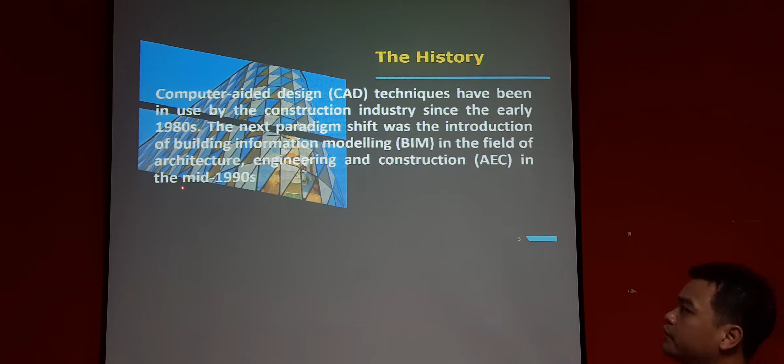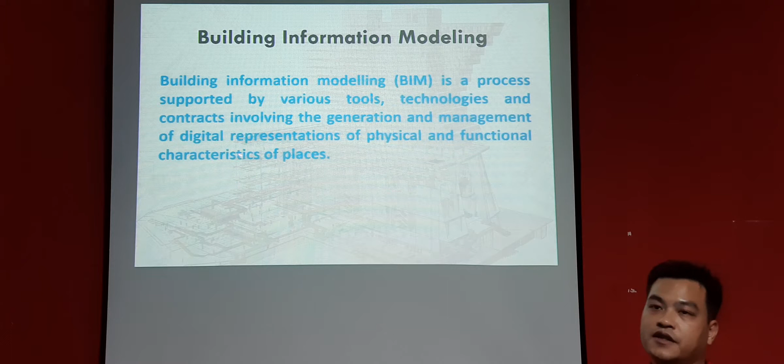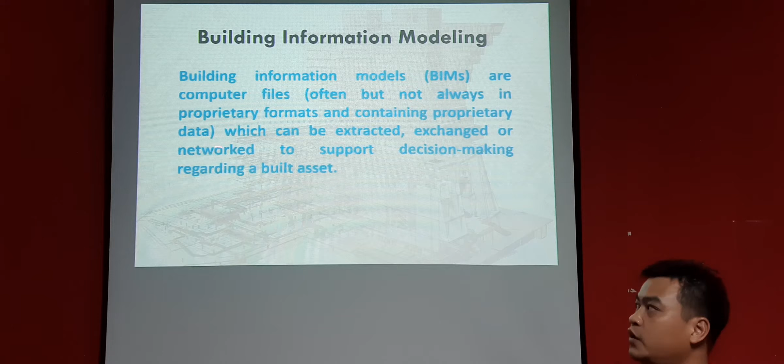Building information models are computer files, often but not always in proprietary format and containing proprietary data, which can be extracted, exchanged or networked to support decision making regarding a built asset.

BIM software is used by individuals, businesses and government agencies who plan, design, construct, operate and maintain buildings and diverse physical infrastructure such as water, refuse, electricity, gas, communication, utility, road, railway, bridge, ports and tunnels.

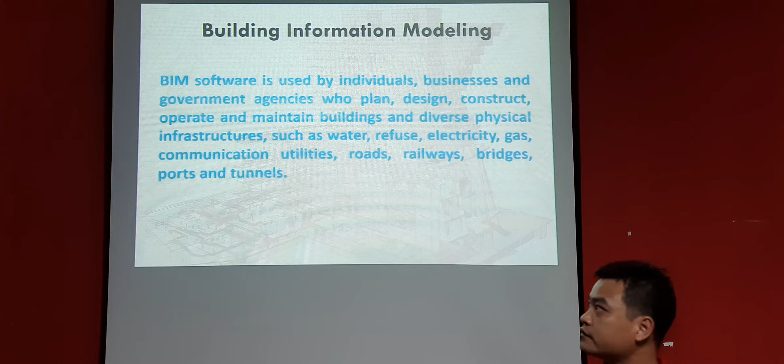In Malaysia, BIM implementation is targeted towards BIM Stage 2 by the year 2020, led by the Construction Industry Development Board, CIDB Malaysia, under the Construction Industry Transformation Plan, CITP 2016 to 2020. It is hoped to put more emphasis on technology adoption across the project life cycle, inducing higher productivity.

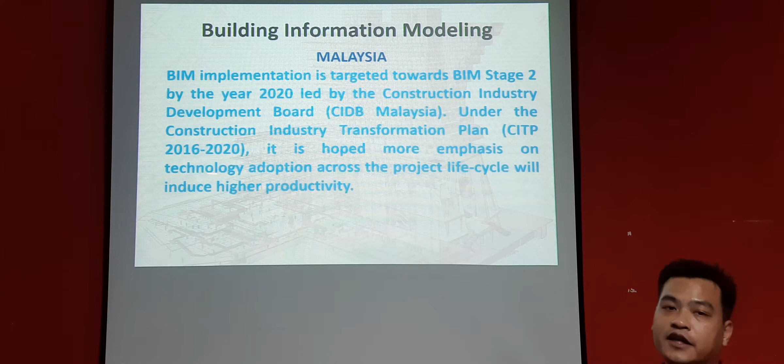How can BIM contribute to the development of smart built environments during the post-construction management of a facility? BIM is a methodology enabled by a set of software, tools and processes for the creation and use of digital representation of the physical and functional characteristics of a facility.

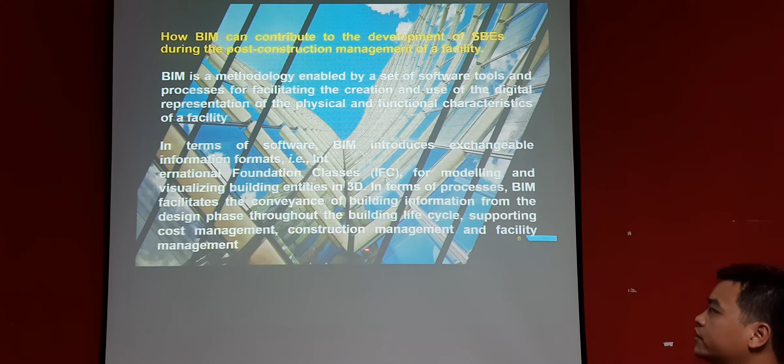In terms of software, BIM introduced exchangeable information format, for example International Foundation Classes, for modeling and visualization of building entities in 3D. In terms of process, BIM facilitated the conveyance of building information from the design phase throughout the building life cycle, supporting cost management, construction management and facility management.

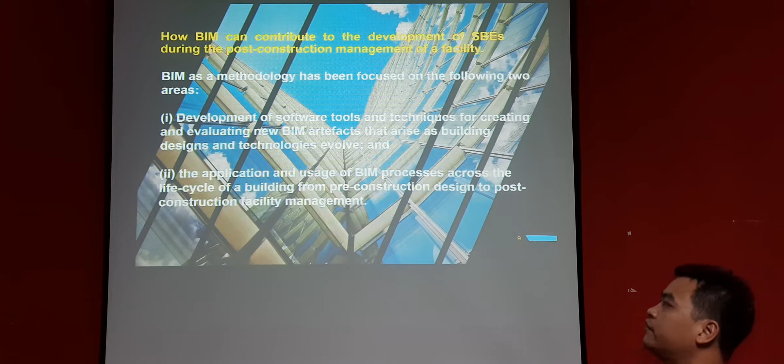BIM as a methodology has focused on two areas. Number one, development of software tools and techniques for creating and evaluating new BIM artifacts that arise as building design and technology evolve. Second, the application and usage of BIM processes across the life cycle of a building, from pre-construction design to post-construction facility management.

The aspect of information communication technology, ICT, is key in the construction and management of emerging smart built environments. Recent rapid advances in ICT have led to their pervasive use across industry sectors, including building and construction, and an upcoming important aspect of ICT use that we anticipate to take a central stage is the construction and management of emerging smart built environments.

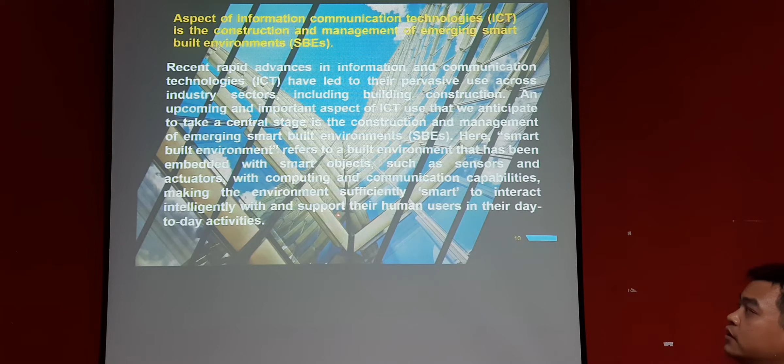Here, smart built environment refers to a built environment that has been embedded with smart objects such as sensors and actuators with computing and communication capability, making the environment sufficiently smart to interact intelligently with and support their human users in their day-to-day activity.

So, BIM in smart built environments. BIM hosts the collaborative architectural information and provides the semantic knowledge of the building. With the emergence of smart built environment technology, BIM should be further developed to be capable of seamlessly integrating smart objects in building design, verifying the SBE design, and feeding smart objects with relevant building-related information.

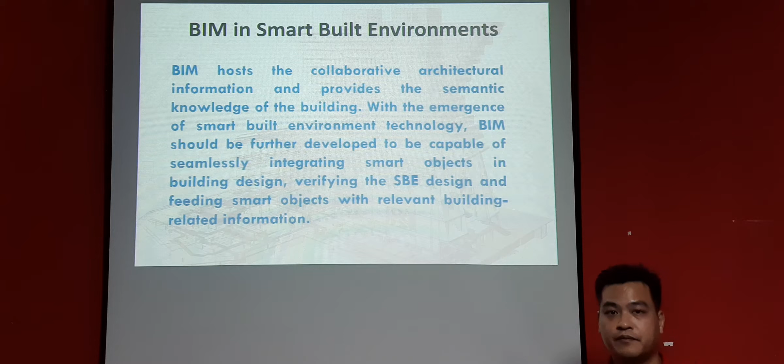Designing SBE with BIM is both advantageous and convenient. Firstly, designers of SBE can utilize the building knowledge of BIM for planning the layout of sensors, actuators and meters. The performance of smart objects can be verified against constraints and their layout optimized for the best functional performance.

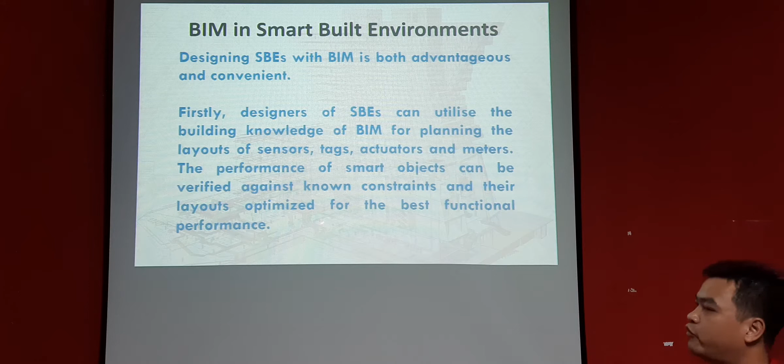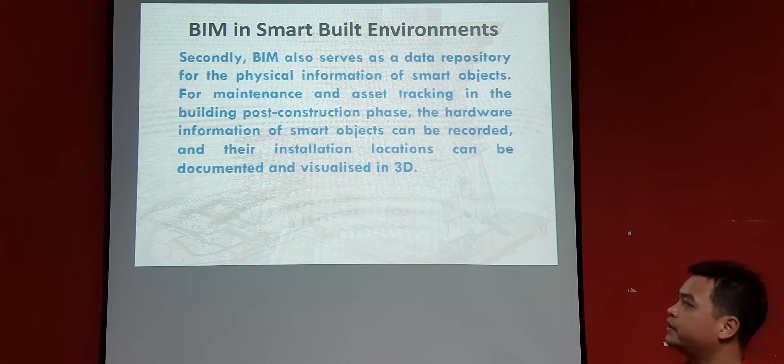Secondly, BIM also serves as a data repository for the physical information of smart objects, for maintenance and asset tracking in the building's post-construction phase. The hardware information of the smart object can be recorded and their installation location can be documented and visualized in 3D.

On the other hand, BIM provides a perfect ontology database for SBE. Smart objects may be designed and manufactured by different vendors. The data they provide may vary in structure, and they may communicate using different protocols.

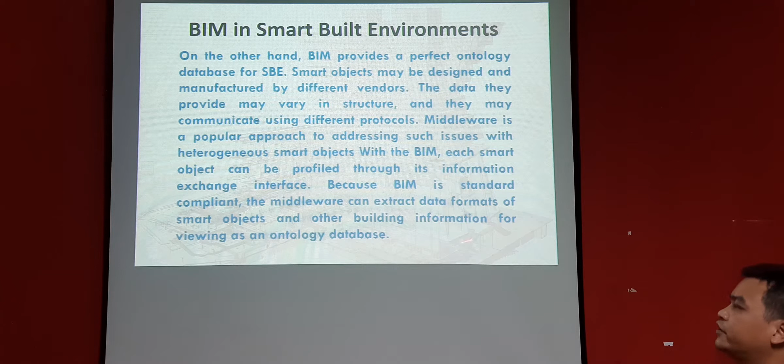Middleware is a popular approach to addressing such issues with heterogeneous smart objects in BIM. Each smart object can be profiled through its information exchange interface because BIM is standard compliant. The middleware can extract data formats of smart objects and other building information for viewing as an ontology database.

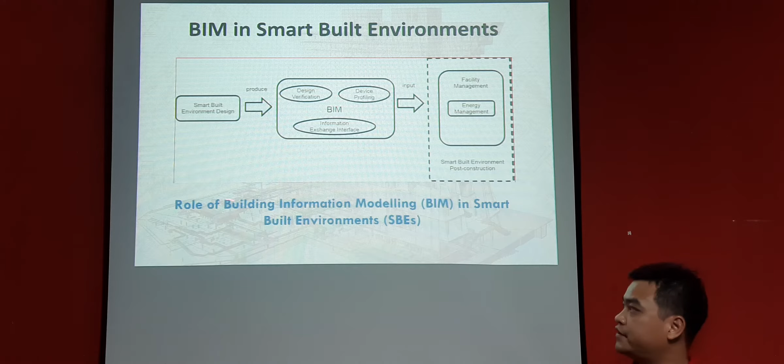So to summarize BIM in smart built environments: starting with smart built environment design, we produce design verification, device profiling, and information exchange interface within the BIM. The output becomes facility management and energy management, called smart built environment post-construction. So this is the role of Building Information Modeling, BIM, in smart built environment, SBE.

So for the case study, I have chosen 4 buildings as my assignment case study. Number 1 is the Beijing 2008 Olympic Stadium.

The 2008 Beijing Olympic Stadium is designed by architect Herzog de Meuron, with engineering consultant Arup UK, main contractor China Architectural Design and Research Group, and BIM consultant MTech Gehry Technologies. The stadium's concept is the Bird Nest. It was built in 2003 and used for the 2008 Beijing Olympics.

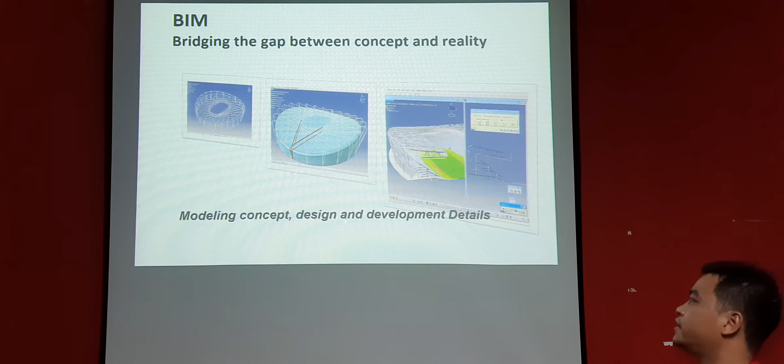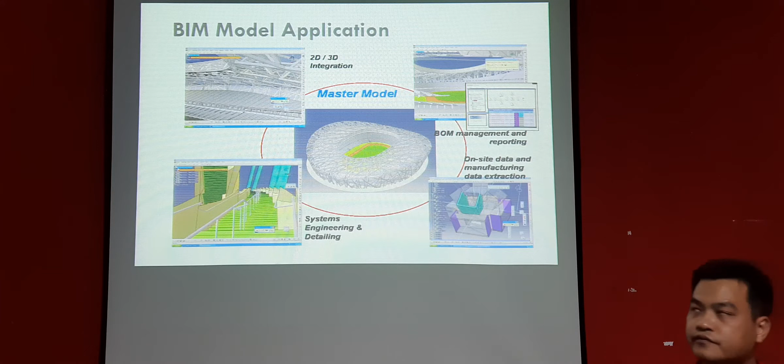The structural beam design can also be used for BIM, so we can see the lines and the erection of the structure, how it will be built in 3D, and the shape of the building, how it will be built.

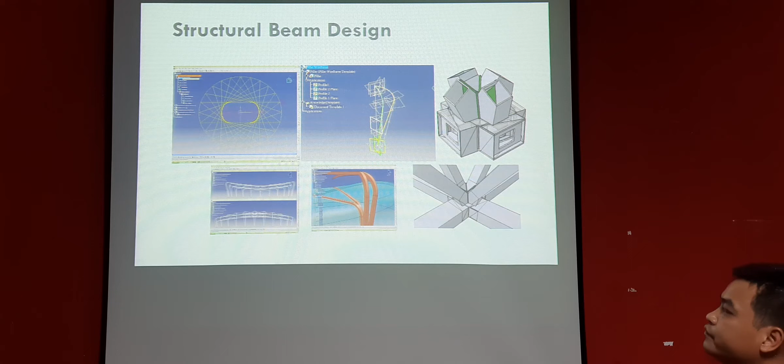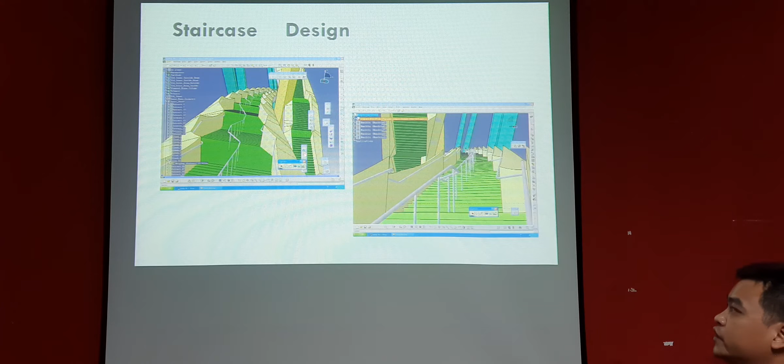It's also using staircase design in 3D, showing how it will look after construction of the staircase. The 3D navigation allows us to see how the Bird Nest Stadium will look in 3D.

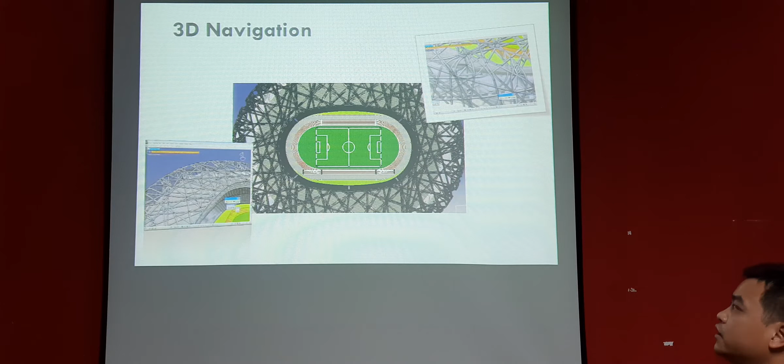For case study number 2, I chose Swire Properties One Island East, owned by Swire Property. The total site area is 109,900 square feet, comprising about 54,800 square feet from the site of the industrial building and 55,100 square feet of adjoining land. The approved floor area is about 1.5 million square feet, approximately 141,000 square meters, representing a plot ratio of approximately 14 on the total site area.

The approval plan is for a building of 70-story office floors to be erected on the site of the industrial building, with a height of approximately 280 meters. The estimated construction cost is approximately Hong Kong dollar 3 billion, and the project was completed between 2004 and 2008.

The consultant architect is Wong Ouyang, structure by Arup, MEP by Bernhardt, QS by Levett and Bailey, and main contractor is Gammon Construction. The project mission is to achieve defined high building quality grade A, the highest commercial building in East Hong Kong Island, and to start up offshore procurement early to reduce construction time, completing the 70-story building in 18 months.

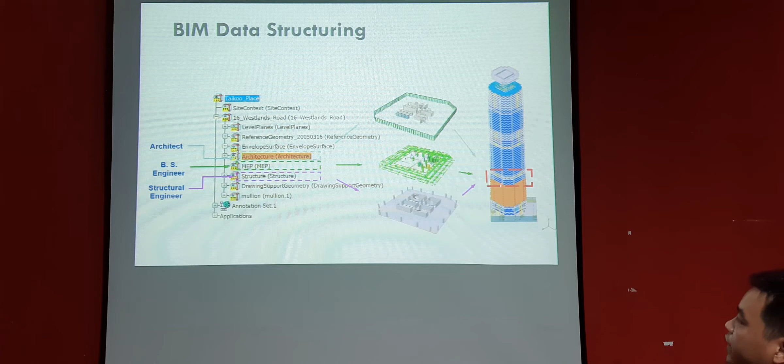The BIM data structuring integrates the architecture, BS engineer and structural engineer from every floor. For example, this is the tower, this is the view, the floor plan, and this is what the plan and 3D will look like.

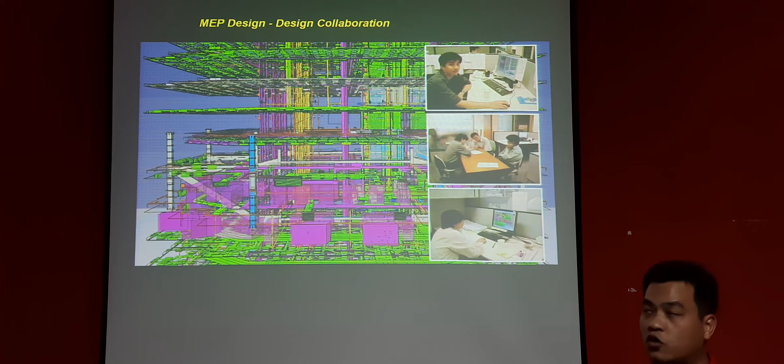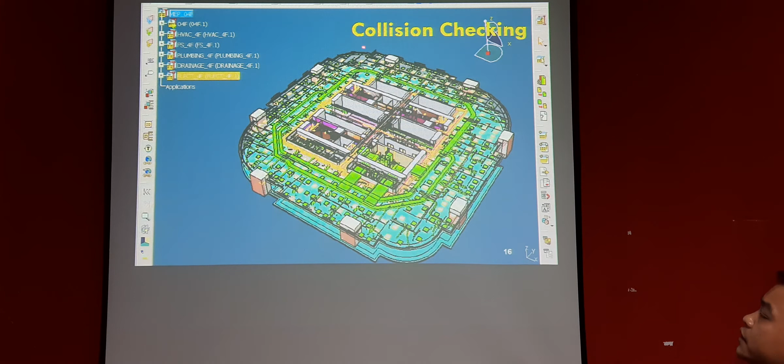The mechanical, electrical and plumbing design shows a design collaboration looked into the building, how the pipelines will go through inside the building, forming an integrated BIM model which can also be used for collision checking for the building.

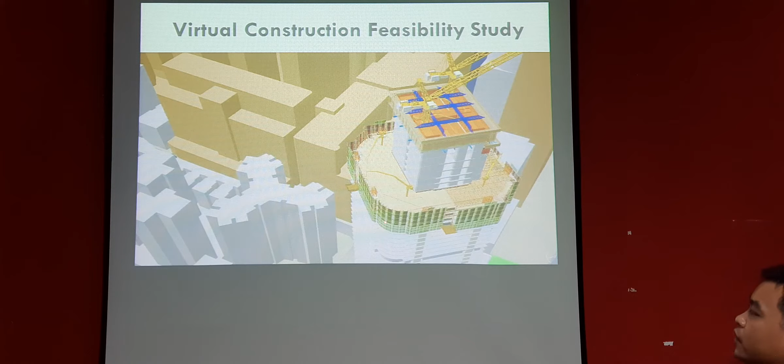For collision checking, there is a virtual construction feasibility study, showing how the building looks in virtual reality before its construction becomes physical.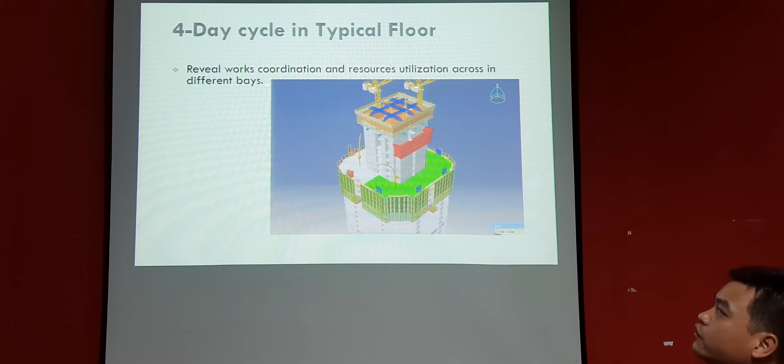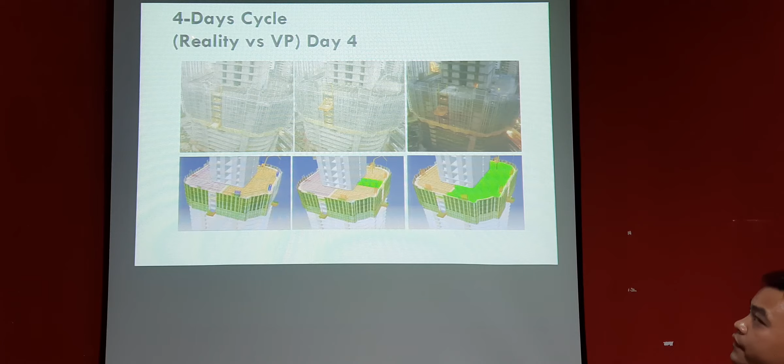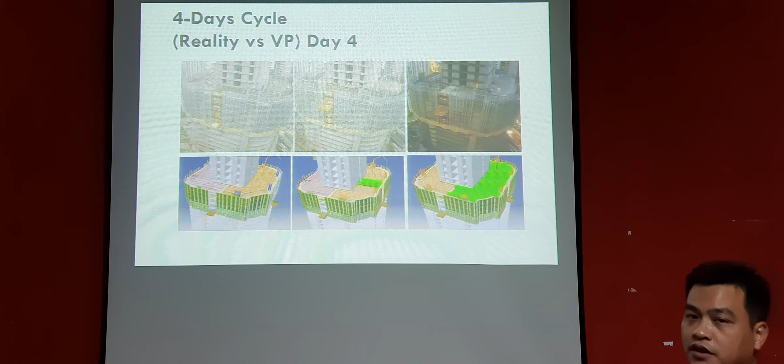This is a comparison of a 4-day cycle in typical floor, showing works coordination and resource utilization across different bays. Comparing reality versus virtual: this is day one, showing how the building is erected, then the reality at day four. The progress is approximately what was designed in BIM compared to its physical completion.

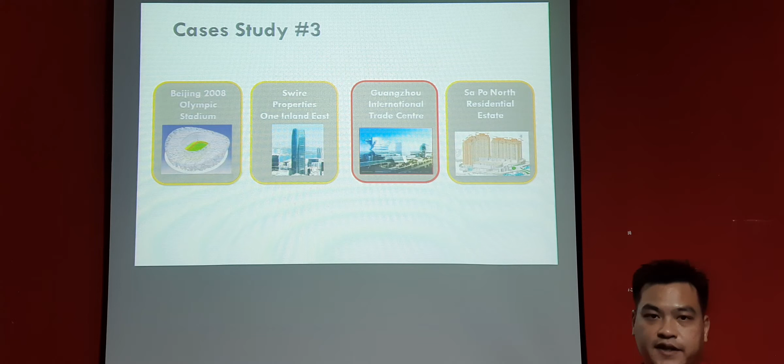For case study number 3, the Guangzhou International Trade Center, completed in 2008. The developer is Nanfung, China. It's an international trading exhibition center with 17 floors.

The first to fourth floor is the exhibition hall, the fifth floor is the dining area, and the 6th to 17th floor is showroom office space. Underground, the first to third floors consist of car park and shopping area.

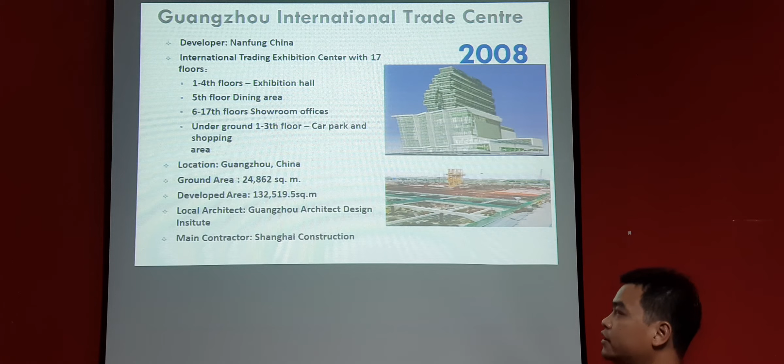The location is Guangzhou, China. The ground area is 24,862 square meters, and the developed area is 132,519.5 square meters. The architect is a local architect from Guangzhou Architect Design Institute, and the main contractor is Shanghai Construction.

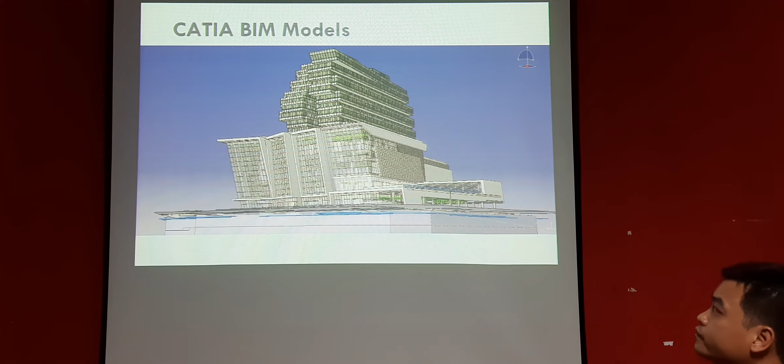Catia BIM models is another software that can also produce BIM. The project mission is to improve building quality, reduce construction cost and time, improve visibility by project leadership into information developed by the extended building team; improve coordination of building systems to identify and address potential conflicts; secure construction cost and time to project completion; integrate design, documentation, and fabrication or construction activity; and reduce project transaction costs like paper printing and rework.

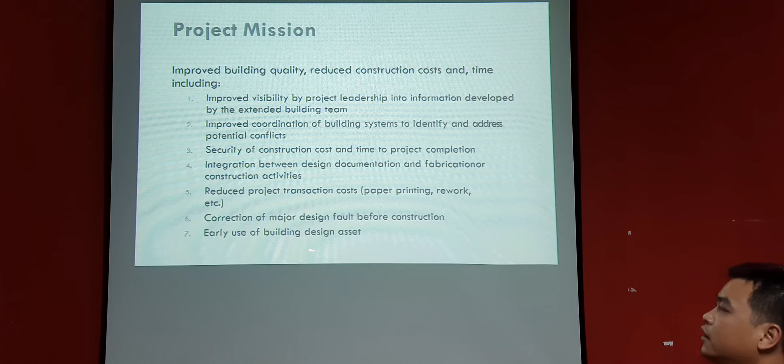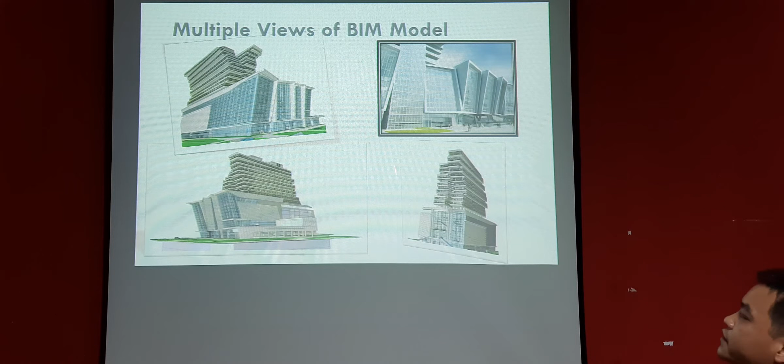This allows correction of major design faults before construction and early use of building design assets. This is a multiple view of the BIM model on the right side and left side, giving a 360-degree view of architecture, structure, and MEP.

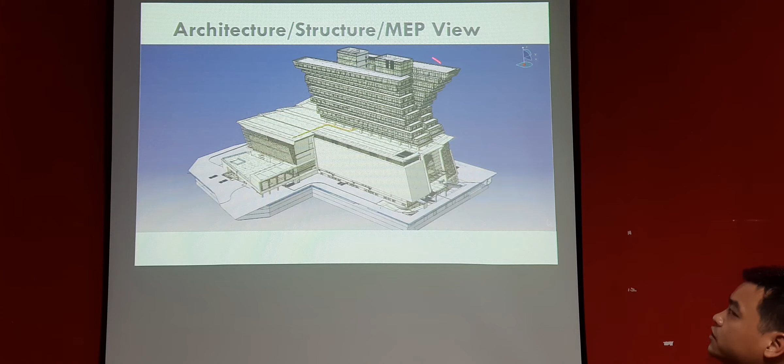This part will be constructed first, then the erection for this bay, for this portion. This shows architecture and structure design conflicts, where the structural beam is above the slab.

Inside the BIM they detect that the beam will be built on the slab, which is an error. From the BIM they can check this error, so the beam cannot be constructed as designed. They will move it and amend the design so that the slab will not be above the beam, and the beam will not be above the slab.

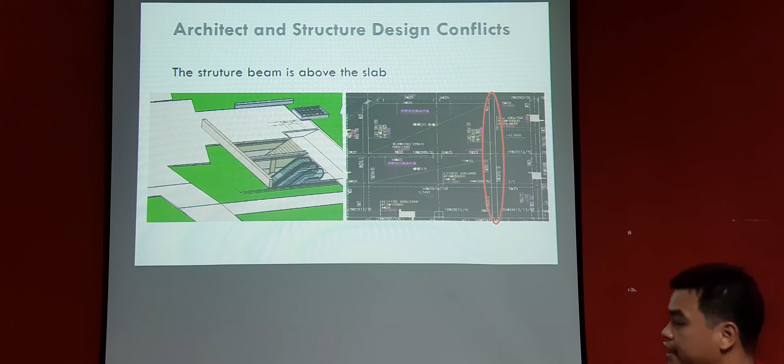So the false ceiling height issue. After installing L04 MEP services, the false ceiling height cannot match 3,100 mm. So from here, this is a lack of ceiling height. From the BIM, they have detected it, and they can see the height is not enough for installation of the pipeline. So it can be amended so that on the physical side no error will happen.

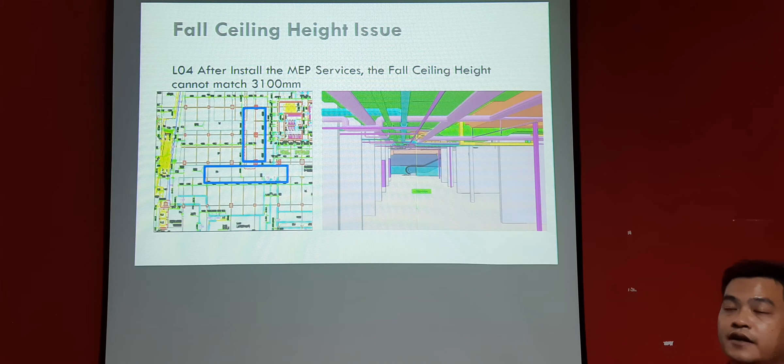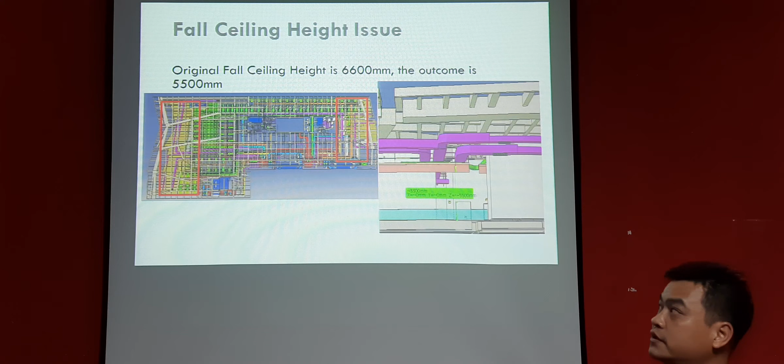So the original false ceiling height is 6,600 mm, but the outcome is 5,500 mm, which means the ceiling height is not enough, because the outcome is less than the original one. The original was supposed to be 6,600, but the outcome is 5,500, so it's been reduced by about 1,100 mm. So the pipeline cannot fit in.

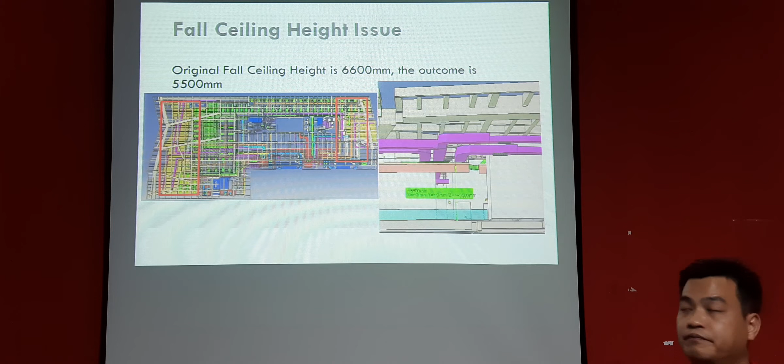So the MEP cannot fit into the ceiling. There's early detection through the BIM, so headroom clearance checking. This is how all the MEP will be installed in the ceiling level, so they can detect whether the height is sufficient for installation of MEP or not.

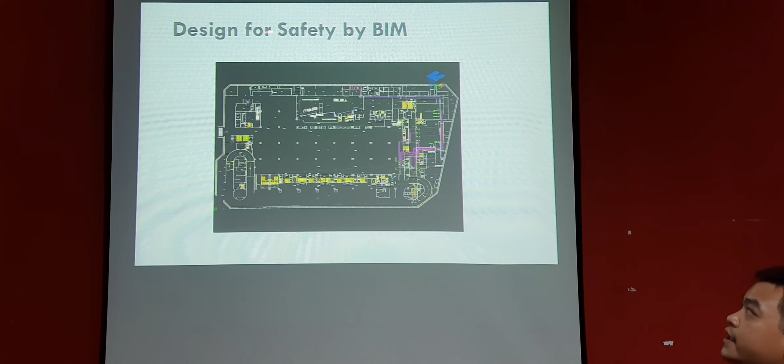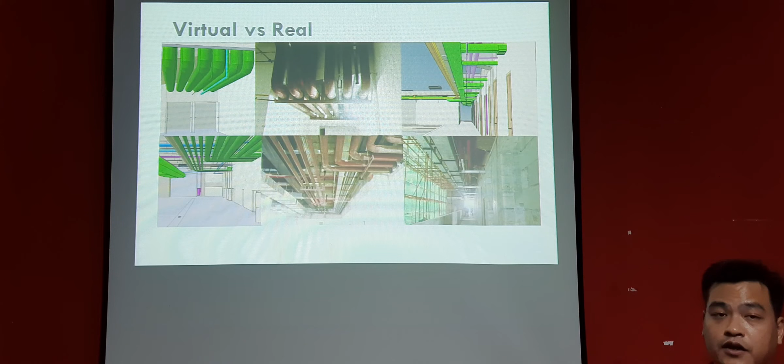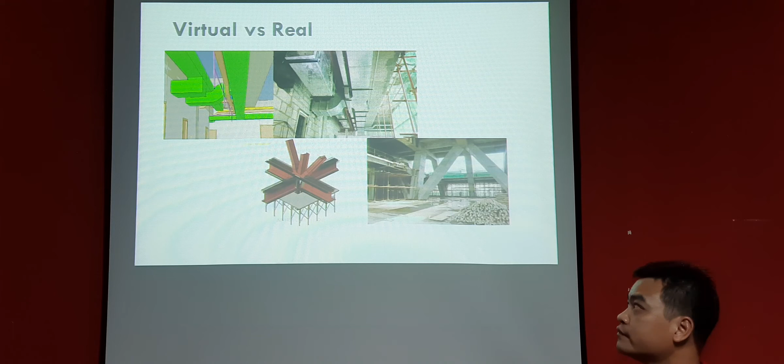So this is air ducting, how it will be installed inside the ceiling. This is the construction of the structure, how it will be erected in 3D, versus the actual one. So it can also be used for 3D navigation.

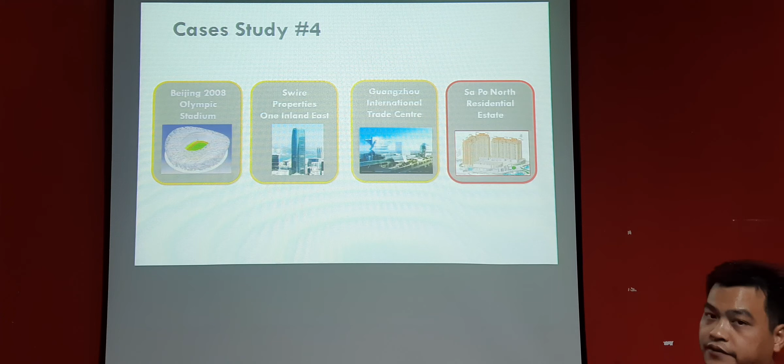So case study number 4 is Sa Po North Residential Estate, owned by Bright Strong Limited. Location is DD107 Sa Po North, Kam Tin, Yuen Long, NT, Hong Kong. The project manager is Sun Hung Kai Real Estate Agency Limited. Architect is from Ronald Lu Partner Hong Kong Limited. C&S and M&E is from Sun Hung Kai Architects and Engineers Limited.

So the site area is about 175,977 square meters, used for residential purposes. The building consists of 36,000 square meters for domestic, 10,000 square meters for non-domestic, and 2,000 square meters for the clubhouse. The building was built in year 2012.

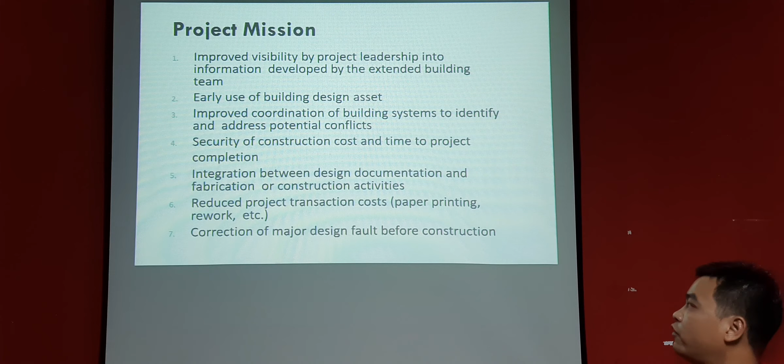So the project mission is to improve visibility by the project leadership into information developed by the extended building team, early use of building design assets, improve coordination of building systems to identify and address potential conflicts, security of construction cost and time to project completion. Number 5 is integration between design documentation and fabrication or construction activity. 6, reduce project transaction costs like paper printing, rework, etc. 7 is correction of major design faults before construction, so testing the work sequence in 4D before the work begins.

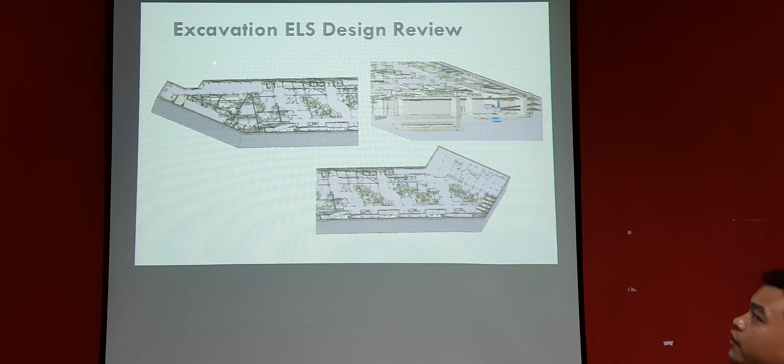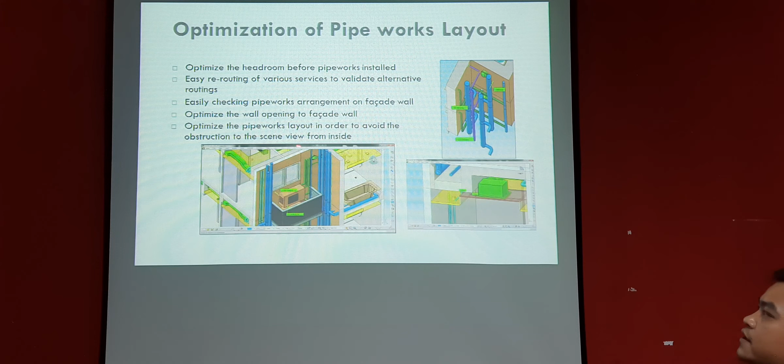Easy rerouting of various services to validate alternative routing. Easily checking pipe work arrangement on the facade wall. Optimize the wall opening to the facade wall. Optimize the pipe work layout in order to avoid obstruction to the scenic view from inside.

So this is mechanical, electrical, plumbing services in the podium. These show how the pipeline will be constructed, so the design is 3D as virtual reality.

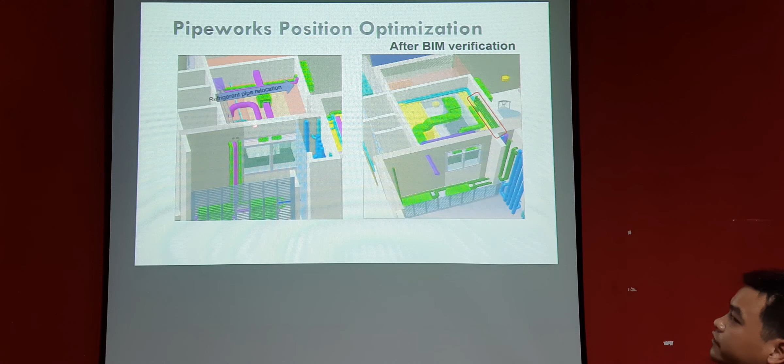So pipeworks position optimization. After the BIM verification, this shows a location of refrigerant pipe that needs to relocate because the space is not enough. So they reroute it, they relocate the pipe, the refrigerant pipe. This is the use of BIM.

So the other aspect is refining the slab level, making work ready by coordinating detailed 3D design. This is shown by section A and section B, looking into the pipework installation in the bathroom by the sunken slab.

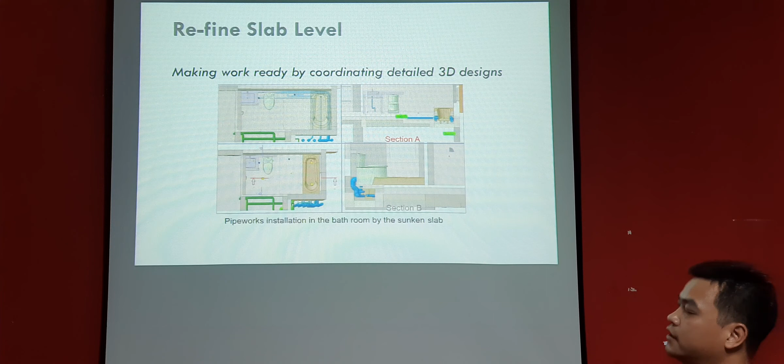So the summary, 4W and 1H. So why use BIM? It's a business initiative - time, cost, quality, customer satisfaction - and also a business challenge, limitation of 2D and collaboration.

So what is BIM? BIM is the process to 3D, 4D, 5D design, construction or O&M, and safety, and go green. So it's lean construction, VDC, asset lifecycle management.

So who will be using it - the use and benefit goes to developer, consultant, contractor, customer, and also BIM consultant. So when - it's during the project lifecycle: design, build, and O&M.

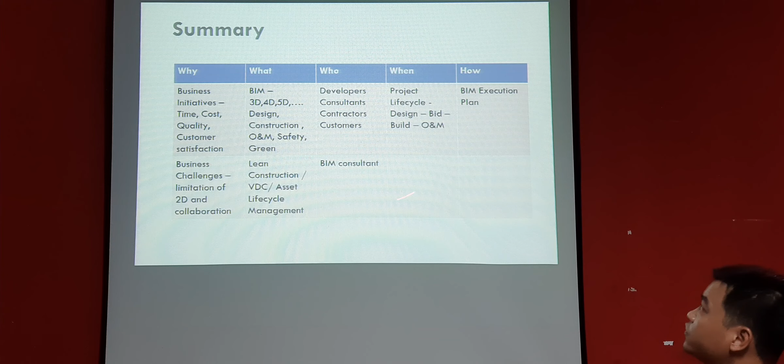So lastly is how. So BIM execution plan. That's all for me. Thank you.